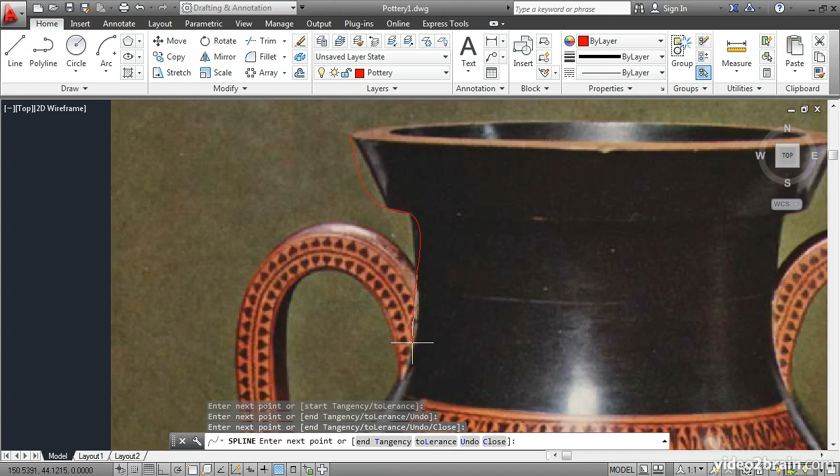I'll click this tool and zoom in to the top of the vase. Click the top corner and then enter the next point here. Just keep going, clicking points along the profile of the vase. Don't worry that the spline doesn't appear to fit the curve yet. We'll come back and edit the spline later so that it does. Let's not worry about trying to represent the handles. Instead, we'll focus on the curve of the vase.

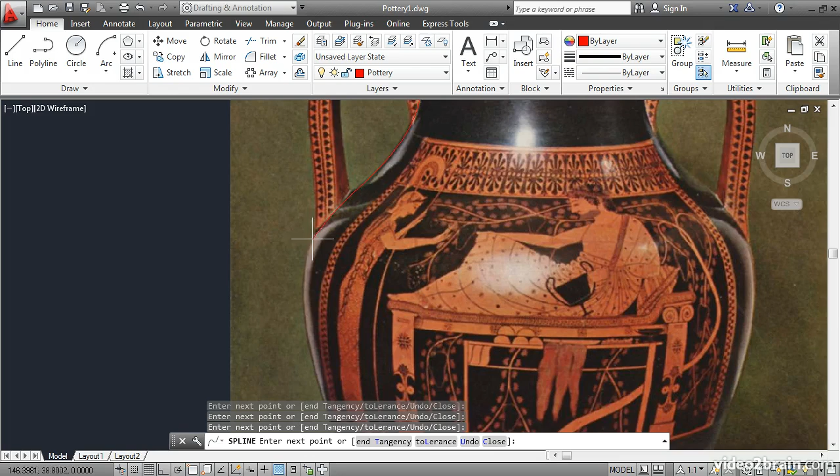Images disappear temporarily while you're panning. I'll pan up by dragging the mouse wheel and click some more points here, right on the edge of the vase. I'll pan up by dragging the wheel, and we'll just come down here, click a few more points.

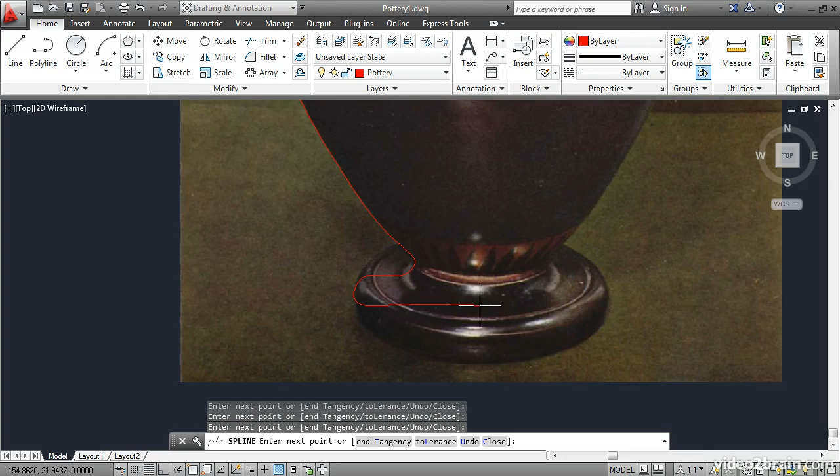Now, because this is a photograph that is underlaid in AutoCAD, we don't have a true representation of the elevation of this object. Instead, we have to kind of guess at how this vase would look in perspective. I'll click about here, have it go down, and then I'll have it go over to some imaginary point here in the middle, about here. Then I'll press Enter to end the spline command.

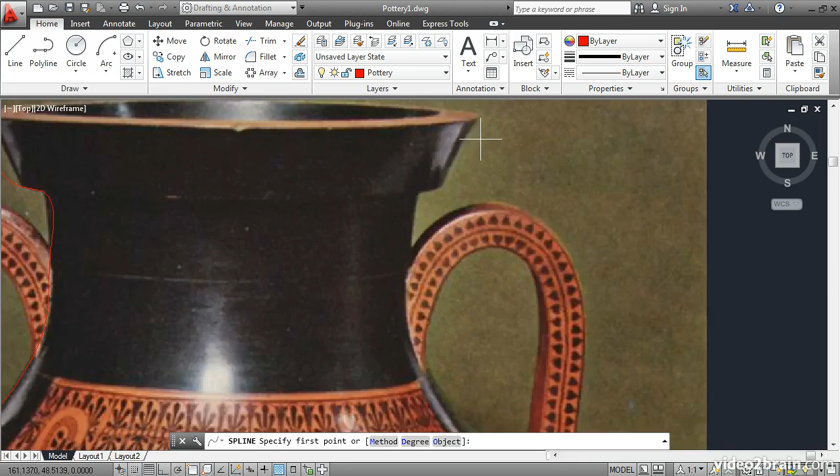I'll double-click the wheel to zoom extents, and let's try the Spline CV method on the right edge of the vase. Expand the Draw panel and click the Spline CV tool. Then zoom into the top, right edge, click the first point about here, and just work your way down. Now this is a little bit different. You'll see a dashed white line appear. This is the spline lattice that you're drawing.

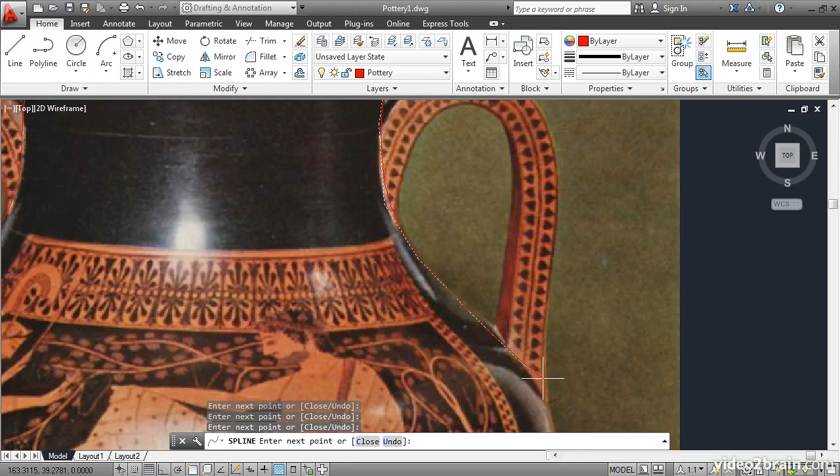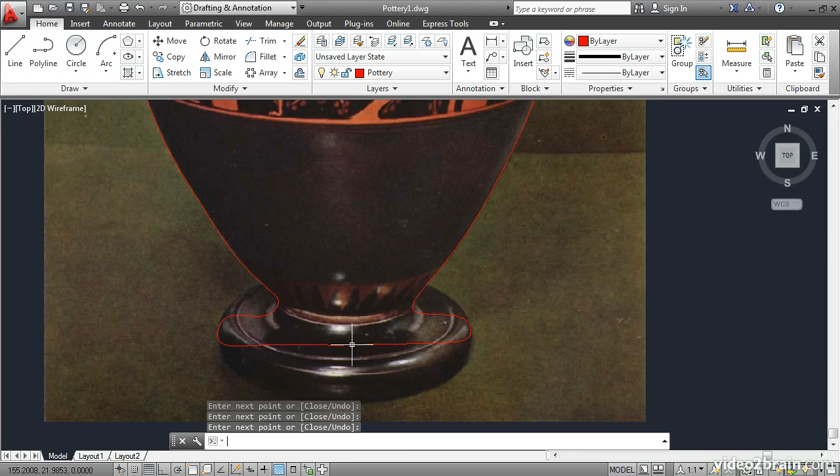The red line doesn't actually follow the curvature of the vase. Instead, it's the lattice that does. It's a series of control points that you're clicking, which are on the edge of the vase. So because of this, the CV method isn't the best one when you're tracing edges like this in a photo. See, the red line is inboard of the actual edge of the vase. I'll come down here and just complete what I started. About there, and press Enter. Now I'll double-click the mouse again to zoom extents.

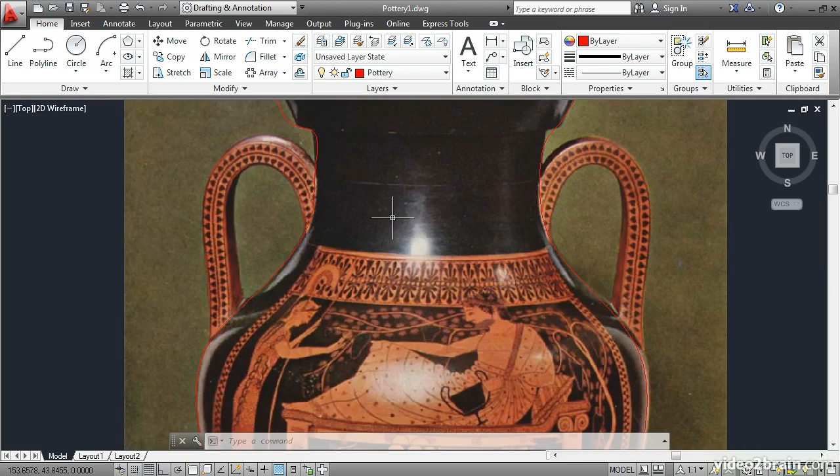Now of these two, I think I like the left spline better because it more closely matches the shape of the vase. Now I'll select it, and you can see the grips appear. These are the fit points, the actual points that I clicked earlier. If you double-click the spline itself, you automatically launch the Spline Edit command. And here you can use some of the options to change the shape of the spline.

In particular, I'd like to introduce a kink into the fit data. So I'll use the fit data option, and then I'll click the kink option. As I move the cursor, you can see an X appear on the spline. I'd like a kink to appear right about here. I'll click, and the kink exists. It's hard to see that at this point, but just one click is all it takes to introduce a kink. Then I'll press Enter for exit, Enter again for exit, and Enter a third time to exit the Spline Edit command. Then I'll come up here and select the object again, and I'll zoom in.

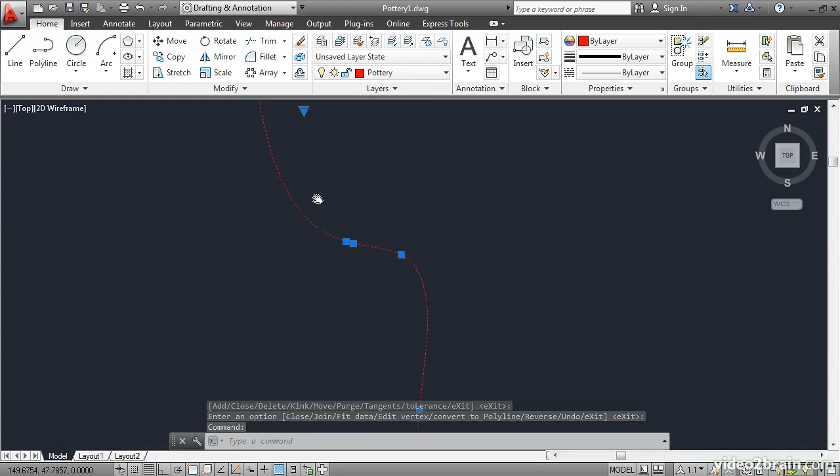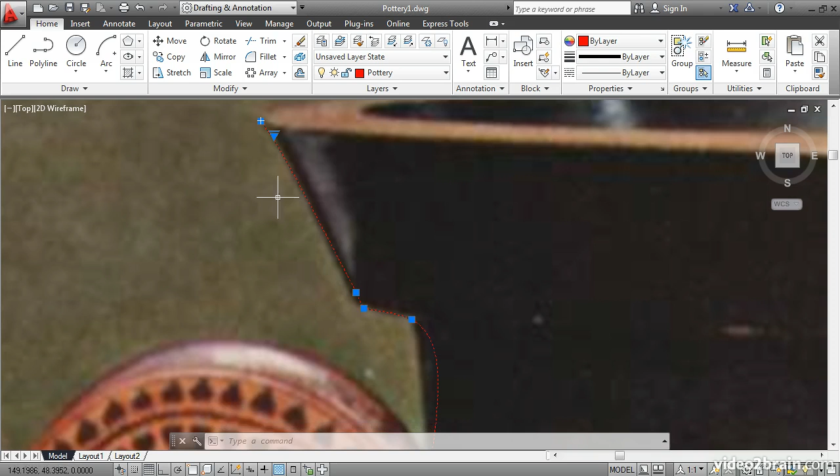You can see an additional fit point exists right here. That's the kink. I'll stretch this point by clicking on it and moving it. And now we have a curvature discontinuity here, and that's also known as a kink. This allowed me to have this sharp edge. Now, I could more closely match these fit points to the shape of the vase just by moving each fit point one at a time.

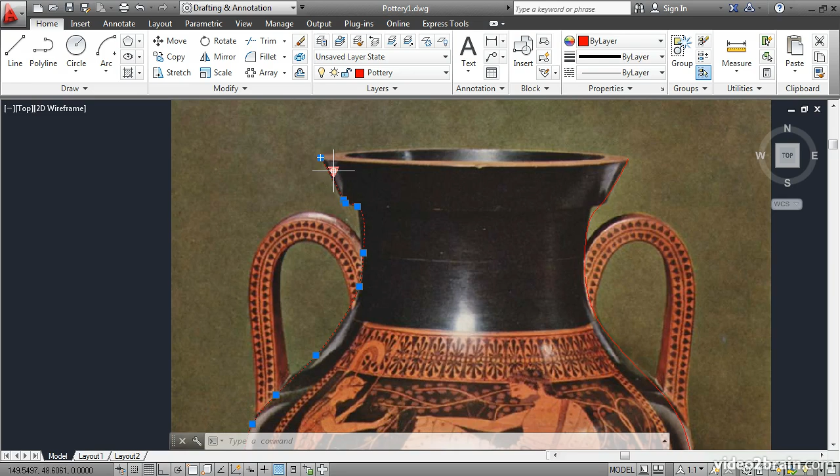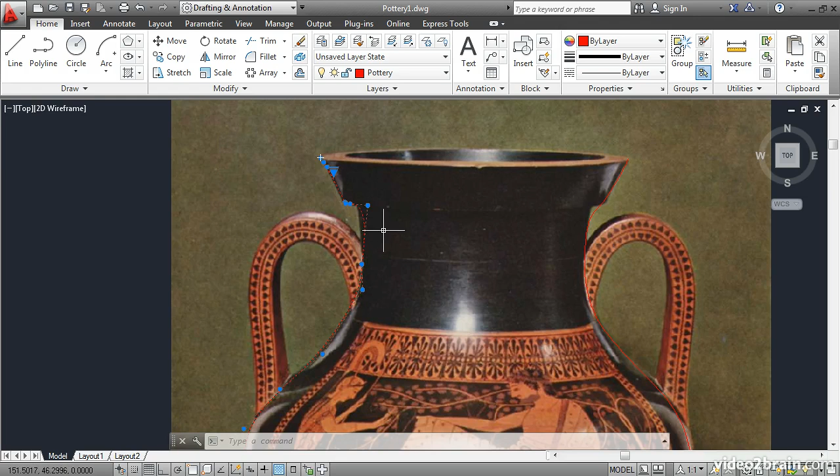But there's a more efficient way to do this, and that is to use this multifunctional grip to change the spline from a fit spline to a CV spline. When you do this, it doesn't change the shape of the existing spline. It merely changes where the grips are located. Now we have a CV spline. It works the same as this other one over here. But we shaped it initially using the fit point method.

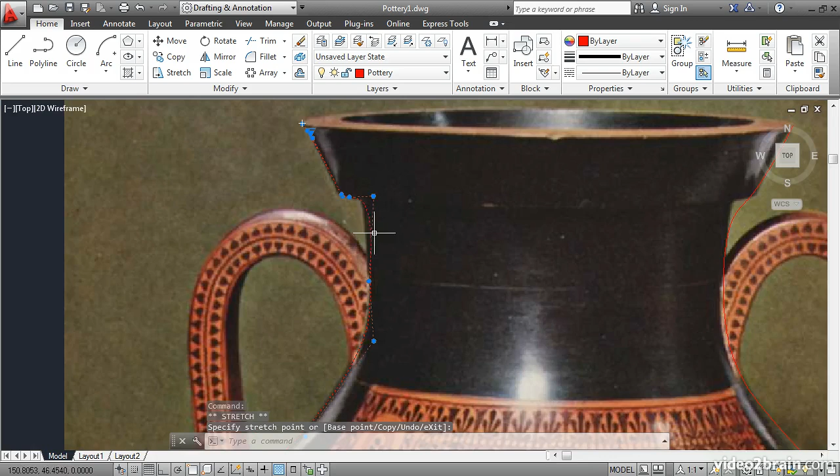Now I can come in here and move these CVs around, and it gives me additional finer control over the placement of the curve. I can move these around, and by positioning them just so, I can try to match the curvature to the vase. Now here I can't quite get it right. It's not really wanting to curve as much as I'd like it to. And so what I'll do is double-click on the spline to launch the spline edit command. And this time I'll use the edit vertex option. And then I'll use the weight option.

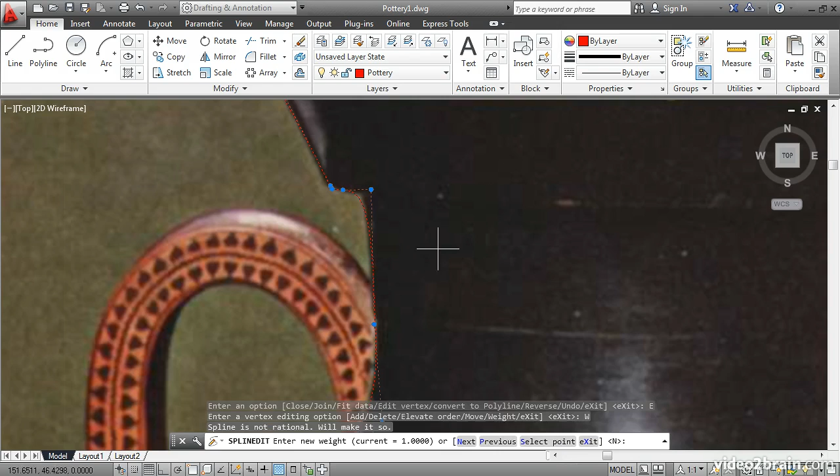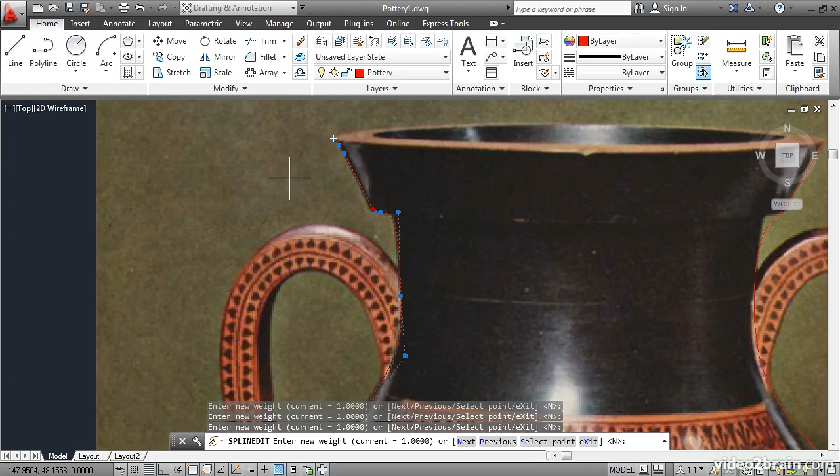To change the weight of a particular CV, you have to first select the CV. And you do this sequentially. The default option here says N, which means next. So I'll just press Enter, and this CV is highlighted. Press Enter again, the next one is highlighted. Keep pressing Enter until you get to the CV that you're interested in, namely this one. Zoom in, and then you can enter a new weight value. All the CVs start with a weight of 1 by default. Let's try a weight of 2. I'll just type in 2, Enter.

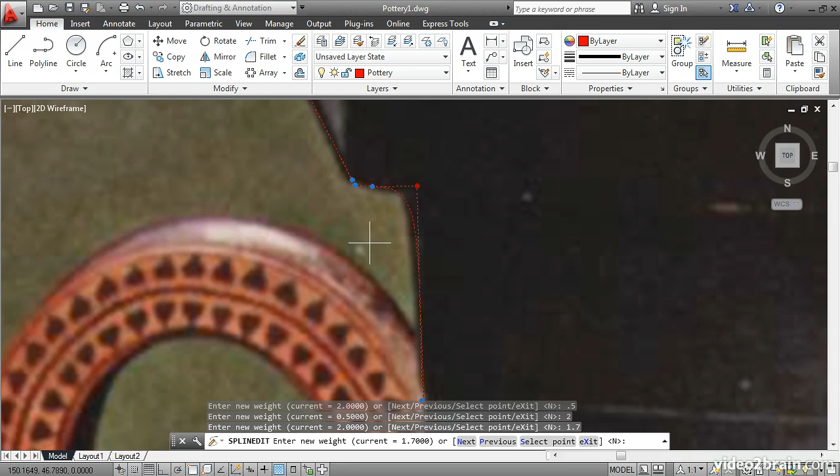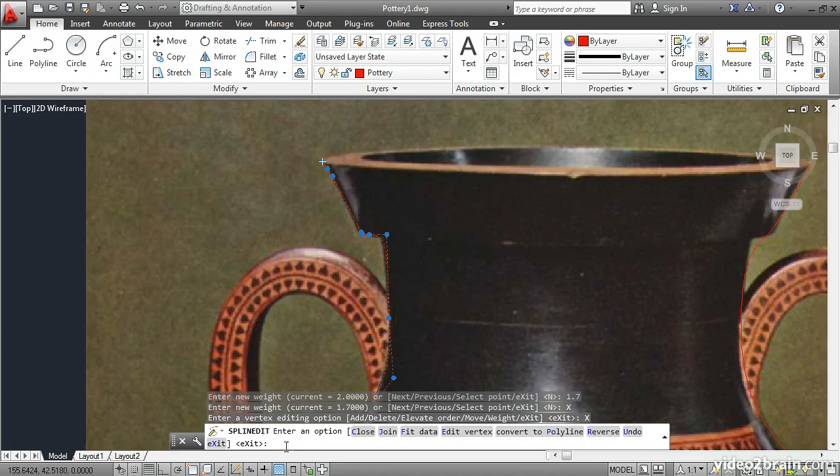And you can see that the spline is pulled closer to the CV. If I enter a weight of 0.5, the spline is pushed further away from the CV. So in this case, it looks like a value of maybe 2 or maybe 1.7 would be better. It's a little bit closer to the curvature here in the photograph. So in this way, you can really dial in your spline object to match just about any curved surface. Now to get out of this command, we have to use the exit option, which is not the default. And then again, exit, and exit a third time to get back to the command line.

In this lesson, you have learned how to create both fit point and CV splines, and have understood their differences and particular advantages. In addition, you used the spline edit command to create a kink at a chosen point and added weight to a particular CV.